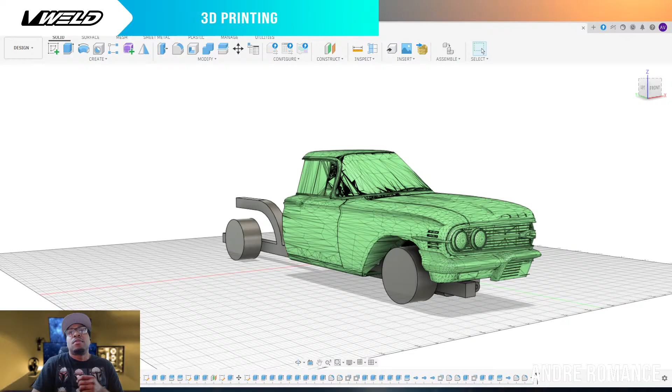So this is where we left off at, where we designed the swing arm mounts, a little bit of the frame, and a rough estimate size of what the rim is going to be like. This is just a rough estimate. It's not going to be the exact size of the rim, but we'll see once we get that far.

So first thing we want to tackle where we left off at was creating that hole distance for the shocks. And there are so many different sizes of shocks that you could use for these applications.

Let's go here. I'll shut that body off real quick. This inner hole here - what we want to do is create a gap big enough for our shocks to go down inside of there and to have a little bit of extra play. So I have 3 different sizes that I mapped up.

And I'm dealing in inches if this is your first time seeing me. I like to deal with inches because it's a lot easier for me to gather. It kind of feels like a 100% ratio number system, so it's easier for me to think about.

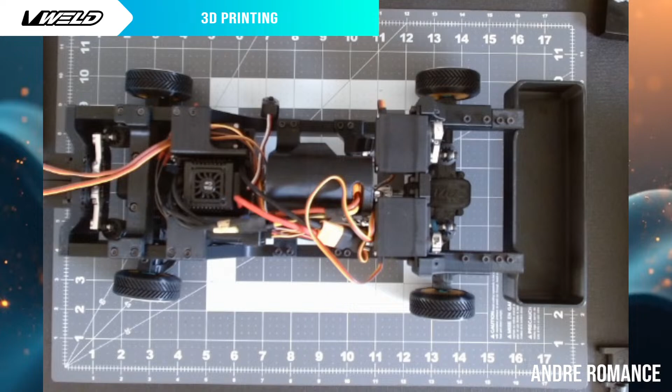Your servo horns, right? So let me take y'all over to the workbench. I probably could just show y'all exactly what I'm talking about a whole lot more than what I'm trying to do here. All right, check this out.

So this would be like ride height, right? Totally out, this would be around ride height for us. But when we have this thing totally bottomed out, these portions here sometimes extend out further than the axle, or the top of the chassis. So it'll bite into the top of the body. When these bite into the top of the body, you don't get a full bottom out.

So depending on how high or what your length is on your shocks is going to play a good part in you getting the right height for your servos or whatever. Now your servos, with them being as close as they are, you only have so much tolerance between the length of this rod here and the height where it mounts to the shock.

So that's what we gotta pay attention to the most, because our boy Derek, he went with the standard size servos. On this system here, this is an 8 inch wheelbase length. We are losing 2 inches of that play because our wheelbase on his vehicle is 6 inches. So what we're compensating for now is that this part here is going to be closer together in order for us to get bottomed out totally.

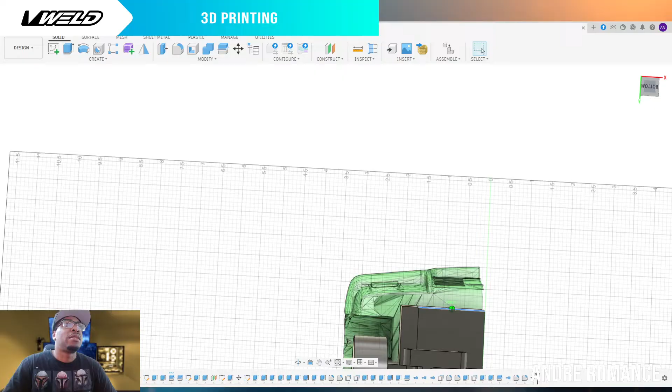I need to remap this body real quick, because I think my scale is slightly short or slightly shy of the 6-inch wheelbase that we were talking about. Or am I mistaken? No, that's right. We're lining right up at 3. So that's right, that's right.

Sometimes you have to say, sometimes you second guess yourself because of the way the numbers look like they're laying in. But all right, let's do this.

So what I want to do is get a reference of the height of that vehicle. So once I'm designing at the center point here, we can do what we need to do. Okay, all right, let's get the right height here. So I am going to do,

Let's get rid of the swing arms for a second. Knuckle. Let's see the body. I should have got rid of all of these other bodies that I'm not using, so I don't have to keep on scrolling down the list. About 100 bodies that are just in here. I'm not gonna do that individually. I should have did that off camera. I don't know why I don't think about this stuff when I'm not live.

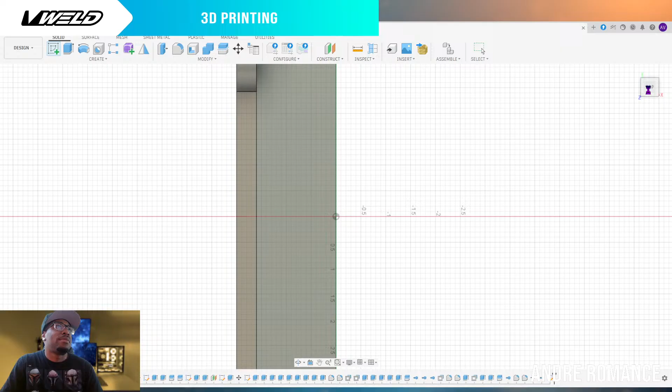But let's do this, so we'll turn the body off for a second. We're not going to keep this box, we're just going to line it up so we can have a reference point here. We're going to draw onto that base that we were at before. Come on, there we go.

All right, so we're going to draw right into this base. We can use a square for this. And this doesn't have to be perfect. This is just giving us a rough estimate of the height, kind of where the servo mount is going to meet the shock.

Right, so now we have that. We're going to close this out. I'll come over here, we're going to extrude this up as high as we can get it with that body being on. And we're going to get rid of that swing arm on the top.

Top swing arm, let's get rid of the bottom swing arm too. So anything that will stick and become a part of this, we want to get rid of it, so when we're extruding it doesn't add on and join as one part. That's something early on you gotta get into a habit of, because you don't want to be designing and then all of a sudden merge a piece that doesn't need to be merged.

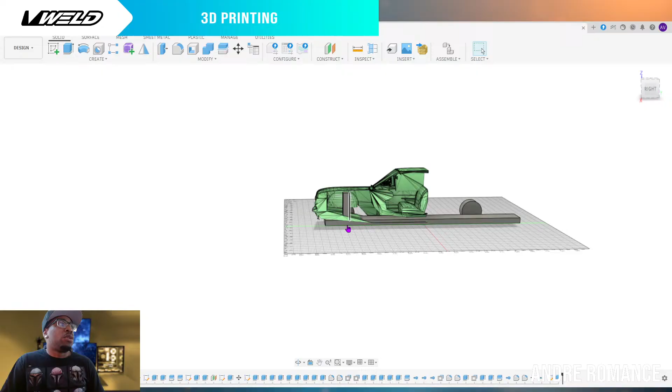So we have this, right? We can go ahead and bring our situation back with the swing arms, right? Zoom in on that, we can get rid of that. We're gonna bring the swing arms back in. Knuckle and the swing arms, right?

So we can actually go lower than this base here. That base just gives us a reference of how everything will sit. But off from center hole, we're gonna possibly bring it from this part here, straight down the middle of the lower swing arm, and then we're trying to measure up whatever that 2.5 or whatever is. Now we know this line here is the middle of the vehicle, so the servo mount, the servo horns are not going to give us that play. The servo horns are going to sit somewhere in this area here from the center, and then they're going to cant out in this direction.

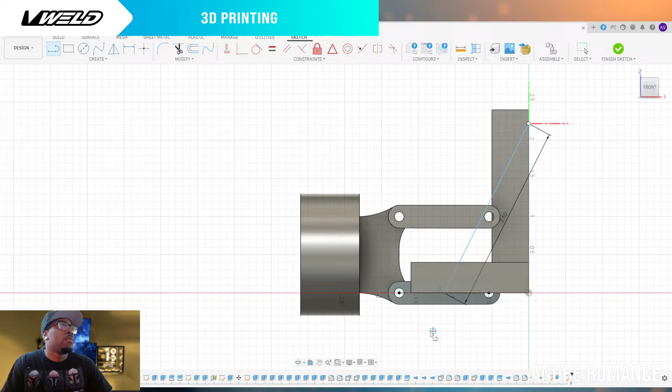Let's bring that body back. Oh, never mind, never mind. It felt like it wasn't within that tolerance, but somehow that worked out.

But now that would lead for our servo rods to have to be right at the top of what we're sitting in. So I think we might be all right, this might actually work, guys, this might actually work. So we'll map it out, let's map it out and see where it takes us. We might even get this thing to sit straight.

And that is, in my opinion, the best way to have your servos be like an L, straight flat, right off of the spring. So you have a lot more travel room for that push, and then you don't have to worry about your spring being at an angle.

Just a second, guys, I gotta go grab something quick. Yep, yeah, you need? Yeah, so I gotta put off the water. All right, sorry about that, guys.

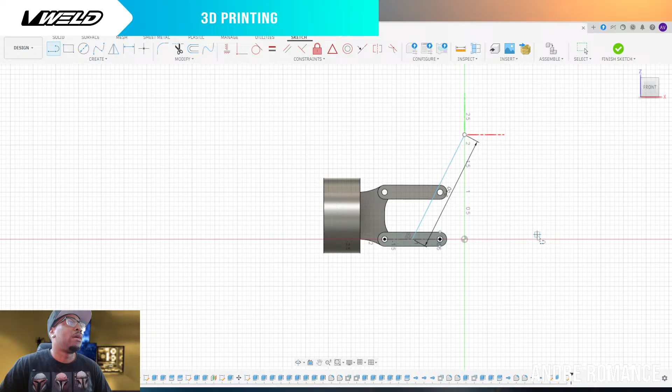All right, so let's take that floor back out. That makes me feel a lot better to see that and know that we are within our tolerance. Sometimes you can second guess the measurements and jack them up. That hole is at a 0.12, so we can always go a 0.13 to make a nice wiggle room.

The outer structure of that whole area would be a 0.3, right? Well, 0.4. That would be like the outer case that holds the shaft for the shocks. Yeah, so I don't think we're gonna have a problem with this at all. All right, let's finish that up real quick.

We're gonna extrude straight through this thing. I may even want to move it over. I want this to be more on the flat side and not specifically down the middle. So let's do that before we extrude this. We'll go double tap back into that drawing.

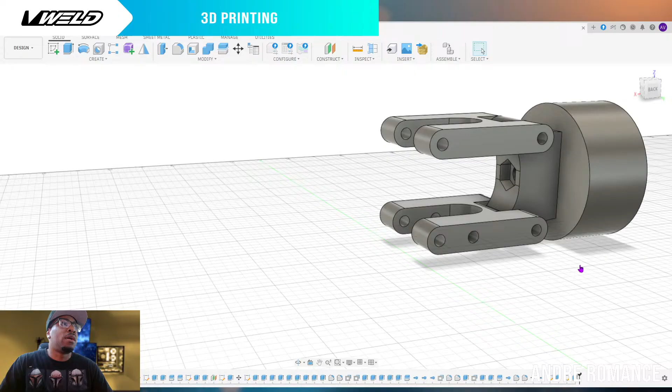So with this, I do want to pick a side, and one of these holes is going to be bigger than the other one. For this application, one side will have an encased layer where the bolt head actually fits in flush with the side, and the opposite side will do a bigger hole for a brass insert. A brass insert, I usually go anywhere between a 0.15 and a 0.2, right? This just gives us space to press that insert in there.

So one side will be bigger, and we'll maintain consistency with that on the same side of whatever we're doing. So even here, if I choose a side, I want all of my inserts to be on the same side, so I'll push those holes out to that distance. Right now we're at 0.13, I just have to move them out a 0.05, or a 0.1. No, 0.01, because I think, if I'm not mistaken, it's moving it from the halfway point.

What we said, 0.01. Yeah, 0.01 makes it a 0.15 now, because we have to cut it in half. You know, whenever we're working with those circles, it's not going to give us the exact number.

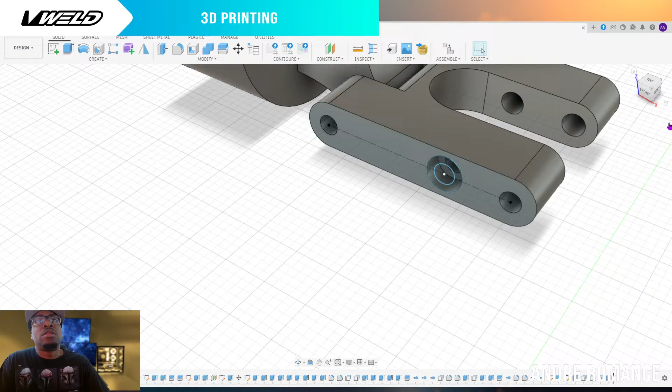Also, it adds a little stability too for the bolt head to not want to bind and turn and twist outside of the part. So there's a couple of things that it does for the durability of the parts too.

So that's what we did there, we would have to do the same thing for these parts here. Sometimes when we do that, we would end up having to add meat around these areas, and that will cause us to end up with like a nice bow or something like that with these parts. I mean, the sky is the limit for designing how to make a part look nice and keep that strength to it as well, but that's what we want.

So we got that. Probably could have, like I said, I would have minimized my workflow if I'd have did these circles here in the same setting rather than having to keep going back and forth with it. That's what I should have did. So what I should have did, I'm gonna do now, 0.23. Yeah, I'm gonna do it now, I should have did it all at once. And that's how you stretch out your time and waste other people's time.

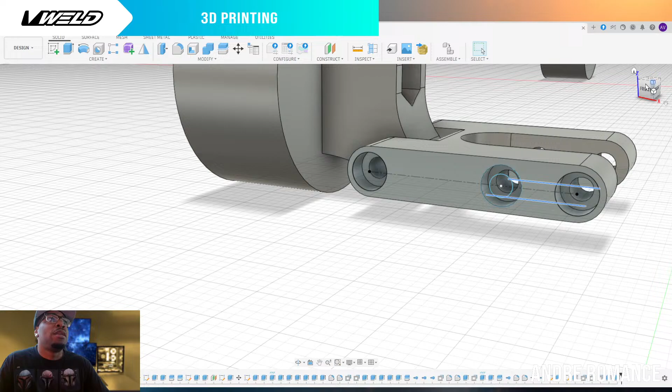Having a 0.5 gives us a lot of wiggle room and play for if the binding is fully extended or fully lowered, causing the shaft or cylinder of the shock to slide through here a little bit. Like if that ends up at a 45-degree angle, remember we talked about the shock coming in at an angle sometimes. With it being at an angle, the shock cylinder is going to go past the arm a little bit in either direction, and if we make it too tight, that cylinder won't fit. You'll end up with a bind right there, so that's why we leave that space. But if the shock ends up upright, that's something you don't have to worry about, and that area can be as tight as you want.

But there are other ways to work around that, because this hole doesn't have to be flush with these holes. We could have extended that hole, or put it above here where it doesn't interfere with the inside of that mount at all. If we wanted this to be even more durable, we take this hole, bring it up above the swing arm plate, and make this whole area solid — kind of like what I did on my other swing arm here, where it's flush and the hole sits above. Dropping that hole down inside the arm gives it more space to bottom out, especially since we're working with a slightly smaller scale than 1 to 10.

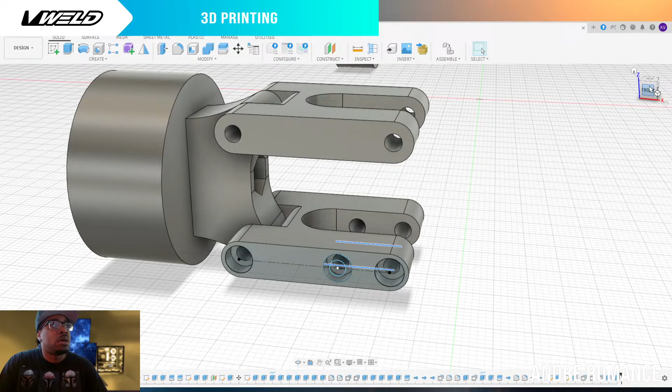The next thing I want to tackle is where those servos are going to sit. In order for us to get there, we're going to have to bring in the frame again.

So we know this top arm here is not going to be connected to the spring at all, right? We're tracking that — this top swing arm is not going to touch the spring at all. With that being said, this has to be attached to something, whether it be the servo mount or just the frame. Now I would prefer to have it attached to the frame, so it's kind of out of the way of everything else going on with the servos. But also, it's going to save space to design that mount to be attached to the servo mount, or the servo mount to be attached to the frame.

So it's kind of like you have to do both at the same time. Because we probably want to tie them in together, I was looking at this inside of the body, and I want to use the top side of this, so I'm probably going to end up bringing this area down a little bit so we can get that portion here on the top side of things.

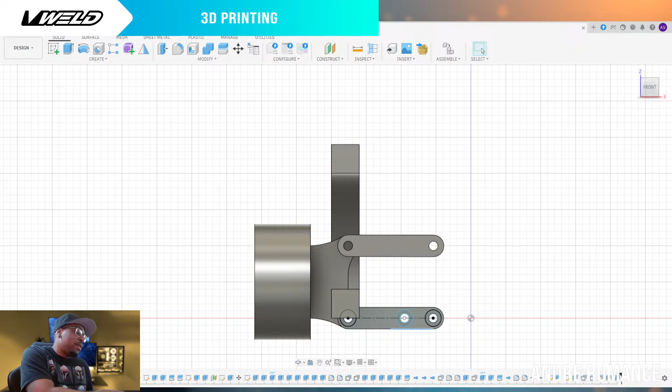So either direction, I think either direction will fit because we have so much play. This bracket here comes in at 2.25 on the height. And then if we can't get that, we can come in with that width because we said we got to be within 6 inches.

If we drop them in on the width side, it's going to come in at 4.6. So 4 inches and 6. So that's something to consider. Both of these are something we'll have to consider when designing this in here.

Which would put, man, that servo horn, it would put the servo horn around this area here if we go flat. So the servo horn being here, the arm would extend back out this way in order to give us a bottom out, or the servo mount could be, or the servo horn could be on this side here. That might actually work.

So let's design them flat first and see how this plays out for us. So based on needing this to come like a latch or whatever coming down, like a hanger, where it hangs on top of these mounts here.

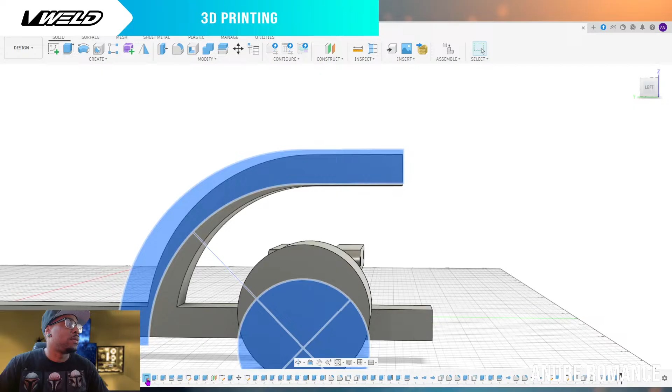This one here. Yeah, all right. So what we want to do is offset this, right?

Let's offset that. What we set by a 0.5. Was it a 0.5? Maybe a 0.5 may be too aggressive. A 0.25. If we do 0.25, or no, a 0.30, because if we can do a 0.30, then our bracket can be a 0.30. Yeah, 0.30. Okay, so we could do a 0.30.

We could take - we're gonna do just a tangent arc. Come on, don't. Sometimes if you don't get the right direction with these, they act up on you.

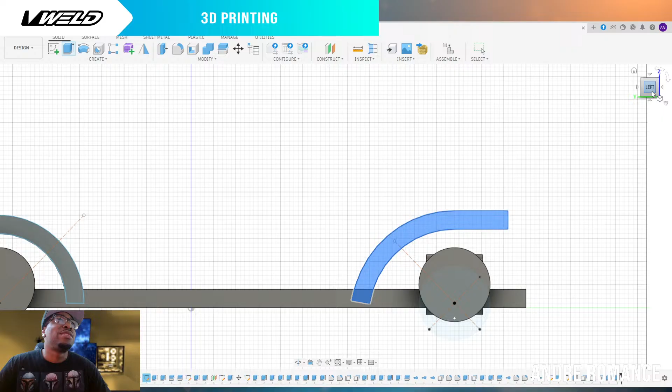All right, so we get that shape right there, and then we got to extrude it out ourselves. So because we have moved this away, let's do this. And I don't want it to end up jacking up any of this stuff here. So we're gonna hide those. We'll do a double-sided, a two-side extrude.

So this side here will attach to this area here, and then this arrow here, we'll click that arrow there, we'll attach to the opposite side. This will give us that push all the way through. Now it wants to cut - we don't want to cut, we want to join. So we'll change that setting to join, and we'll get that new thing going right there.

It's always cool if you start big and then pull your way back from that point and shrink them down if you need to shrink them down. And also it'll always be inside of your history, so if you want to undo this stuff you can, but that's why I keep it simple. Like this is simple, I don't overcomplicate it, I don't try to overcomplicate it.

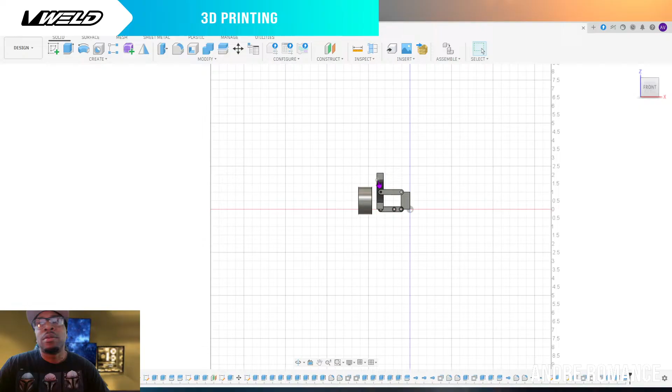What we got - that swing arm. Okay, so totally bottomed out. We still gonna have a nice little space for this to bottom out. So what I'm looking at is the space between here and in here will probably be around the same height as the tire. And we're nowhere near close to this here being hitting here.

So we're gonna have a good position on this. Even if we gotta move this frame inward, we can still move this frame inward as well. So we got a lot of wiggle and play room here. So it's not going to be a problem.

The thing that I wanted to get to is that top surface, right? So if we go back and we look at the body - right, we look at the body where that body sits - the top of our bracket for the servo is going to rest on top of here, which is going to be a 0.3 that's going to add to the top height. Then we'll have the screws that come in.

One thing I'm curious about too is how it's going to play out. We might end up having to put the servos on this side rather than on this side. The body frame sits out here, right? Like a lot of this is going to be hollow to about this point here.

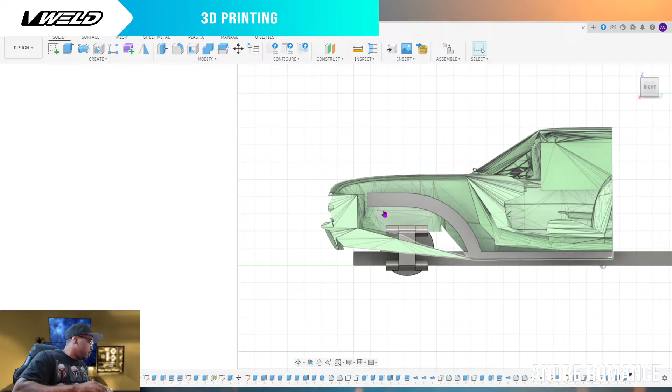So from here to here, a servo is not going to really fit in that space. Even if we go flat, we still may not get that space for that play to happen. Our servos - the width of the servo - I should have grabbed the servo anyway.

Yes, sir. Yes, sir, I got you. Just a second, y'all.

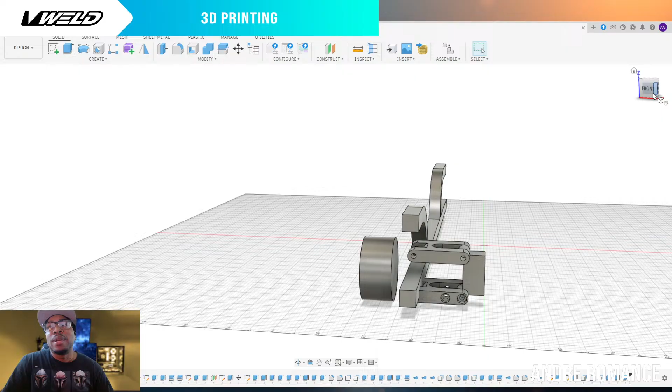All right, so I was thinking about going flat at first. Let's start with this one, and let's see if we can get this to play in nicely. Hopefully it does work out. But if it don't work out, then we just go to the flat and do it that way. But we got to do it how we got to do it, right? We're gonna do it our way.

All right, so let's bring that flat plate back. That flat plate is going to, where is it at? Center plate, right? What I want to do for that center plate though, I want to pull, let's get rid of that.

The axle in the frame for a second, and the bottom swing. I'm gonna cut this plate back. Now this is just a template, but we're gonna cut it back anyway. This is just gonna give us that area to play off of. Okay, so

we'll actually create our servo mount based off of this area. So, servo height. This is where the numbers get exact, like the exact measurement of the servo, so the servo clips in here so nicely.

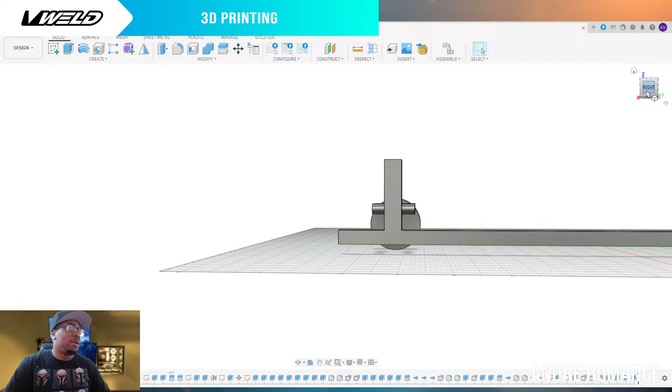1.565, right? 1.565. So let's draw off of this. Let's draw off of this side here. Drawing off of this side here. From the top.

Frame back. From this top edge here, we're going to be drawing out across here. But we're going to be drawing onto this surface. Or should I say the back surface? We're going to draw off of this swing arm surface.

There's so many options here, right? And that's why I'm looking at this like this, because there's so many options to choose from how to do this. So come from this side. We do want to draw based off of this top edge here. So let's draw us a square based off of that top surface.

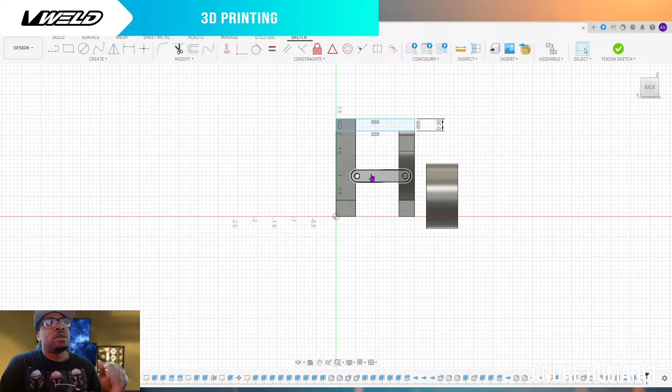But also the weight being forward or backwards will give you a hop height as well. With it being on the back side of the wheel well, we're probably gonna add more hop height as far as the range of the hop, but we'll lose in terms of that front bounce weight, like on the rebound, on the recoil of that bounce back to the floor, we'll lose a little bit of weight on the front end. So those are things to just play around with and think about. But also, when you have a compact space to fit everything in, you just have to roll with how you can fit it in there as best as you can.

Let's see, these frames that I had marked up, I think I went with 0.3s on all of these. Oh, never mind, these are 0.4s. So I guess I carried it out through the rest of the framework, the 0.39. Yeah, 0.39s and 0.35s. All right, so let's go that route then, and keep it kind of consistent with what we did there.

Like I was saying, the servo horn, you want to kind of map it, how it's going to be. So what I'm going to do is sandwich the servos together because we only have that 6 inches of play. I want the servo horn to actuate towards the outside, towards the frame, rather than the servo being on this side and actuating into the inside. Now that's something to play around with later on, but if we can get the servo horn to swing out to the outside of the vehicle, it'll be a lot easier for us to get that height range on that swing. So that's the direction I want to go with it.

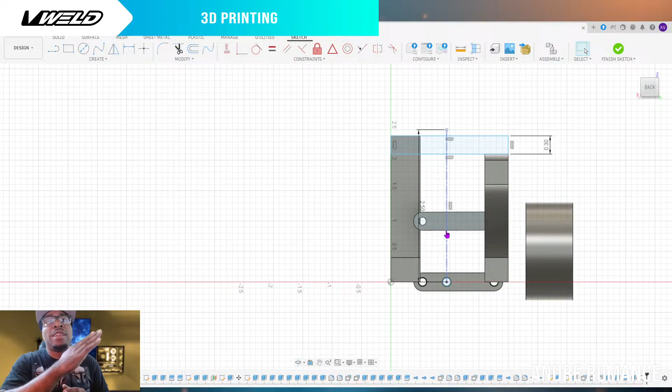This is what I was saying about being inward, see if you can't fit this in. Say this top rail here was the top surface of where the car body is going to rest, right? This would be bumping right at the top of that body, and this is the center hole. So if you add 0.3 to this, we would not be able to hit total bottom out status with this. Our servo would end up having to be on this side so that this could swivel in towards the inside so that it can accommodate for that length to fit somewhere. It had to fit caddy corner rather than upright.

So I mean, we might have to go that route. I didn't want to have to put them on the outside, but we might have to put them on the outside. But it's all right if we do it that way, it's all right if we do it that way. I'm all right with it. All right, so let's do this, we're gonna draw out our square, right?

Let's go 2.5 for the bracket length. So that'll be from the bottom side. No, that'll be the top side. Let me measure this again. So we want to go from 1.565. Let me calculate this up real quick, y'all.

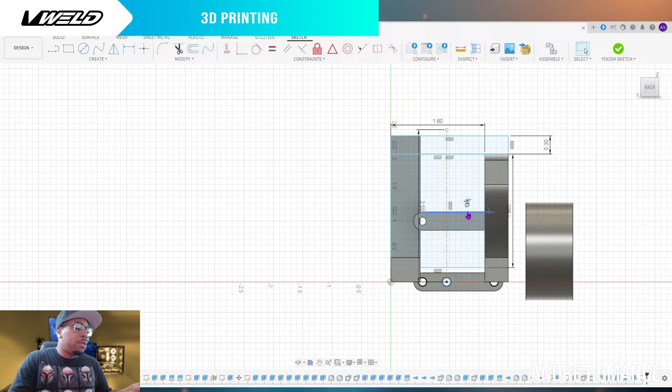Thickness of our servo, .93. Man, let me get the servo out, man. I'm trying to do this on the fly. It's bothering my brain capacity to think right now. Let me grab a servo for real.

They came and fixed it. The water thing is really something. All right, y'all, I'm sorry, man. I was supposed to grab this thing a while ago, but I didn't.

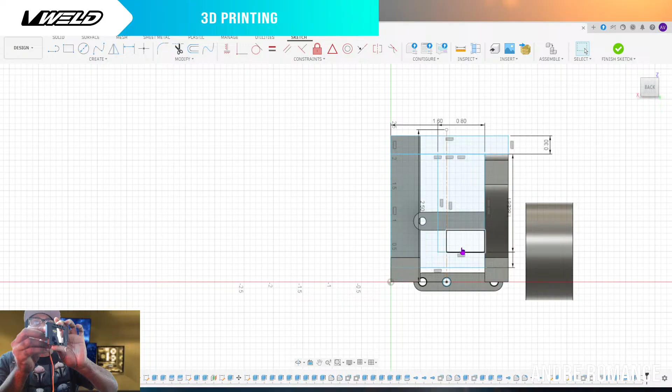You don't have to worry about it getting stuck, or like these wires here. Sometimes when you make the fit exact, you won't be able to get this wire in there and through the frame. So those are things that I ran into in other designs. Like I think this was one of them. I designed basically off of the front mount, where it goes through the front. Right, it clips in like that into the front.

But if you're designing it to slide in through the back, it won't fit in there because the cord will not go through the back. This was some stuff that I had ran into issues with, like trying to design this. Like with that cord, it's such a perfect fit that you can't get it in there. Those are things to think about, because when you're trying to do maintenance on these parts, you're going to end up having to unscrew a lot of other parts in order to get to it. So the idea was just to have it fit flush in there, without having that hassle of trying to find that wiggle room.

So with it being a C channel, you can have it mounted into the back side. So that'd be the difference.

Whether you're going to mount it on the face of this, where the servo horn is only sticking out a little bit, or mount it on the back side where your bracket is going to sit back on the back side of those attachments - those are things to consider, how far up your servo is going to be sitting compared to where it's going to land on this frame.

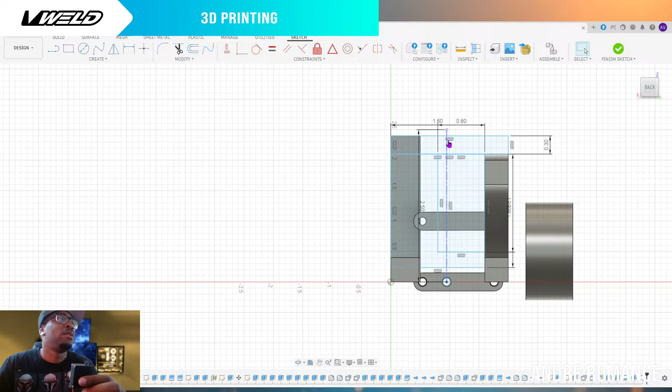We'll have this C channel here for that servo to sit down in the middle. If it sits in this vicinity inside of this channel, we're looking for our hole to be somewhere around here for that servo mount, which would swing out to that side a little bit to give us that pivot link right there for the shocks.

All right, so next what we want to do is create a line here too for that mount. This mount is going to go all the way across the top, we're not going to stop shy of there. We're going to go out 0.3 and then carry it out the rest of the way so we can get that bottom side there. Now we have that line going there.

Now from our center point to center point, we're going to find the center point line, and then drop those holes in. Those holes are going to be our mounting points. I like to countersink the holes on those as well, just like I did in this bracket here, just so it gives you a nice clean area - you don't have to worry about your servo horn hanging up on those.

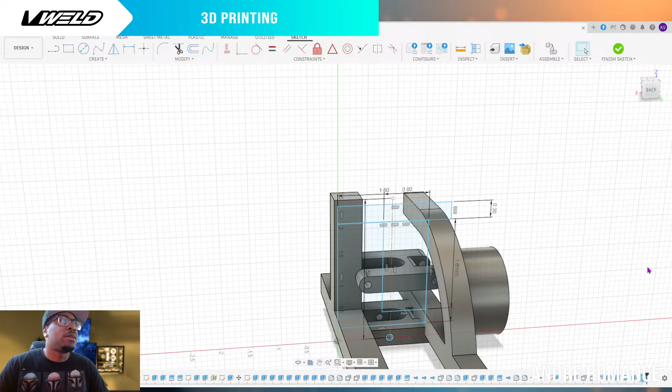All right, so I'm gonna extrude this out. I'm gonna finish it up, extrude it out, and then we'll come back into it.

Let's go back in real quick - there's one line that I left out. And I thought that I drew the line on the right side, but I drew it on the wrong side. There's this line and then that one.

Let's get rid of that center block real quick. Sometimes it'll be trying to snap to so many different things that you can't really see. Let me drop the measurement here so I can see where this is going.

That's the measurement there, and bring them down from there, square them out. Actually, you're supposed to go all the way down. Now we can get rid of this here. Just like that.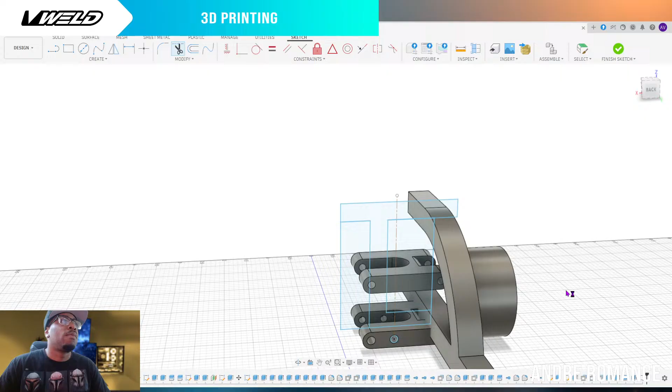So now y'all see what I'm saying as far as this here. We can extrude these out.

What was the extrude? A 0.3, right? That's a 0.28 on these brackets here, but I think we'll keep it consistent - 0.28, 0.285. Yeah, let's go 0.3. I want to keep these numbers where they need to be.

Only way we could do this and kind of remember these numbers is to make them simple. I had to keep reminding myself to make things simple - sometimes that's the hardest thing, especially when you think like a mechanic or engineer. There's always a creative way; as an engineer you want to push yourself to the limit and get your creative juices flowing, right?

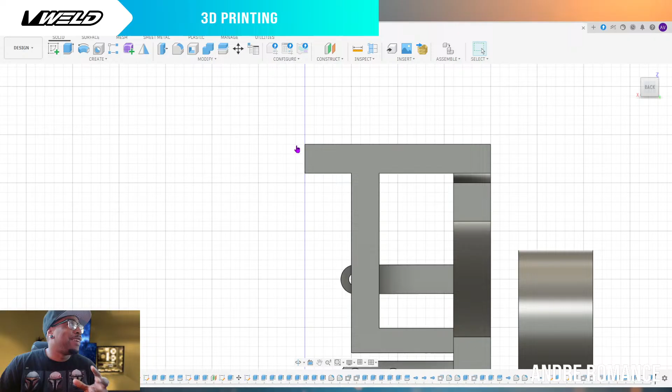But in doing that, you always create something that's just like, why would they do that? Especially when you're working on cars, you go, man, whoever engineered this did a number on us because now we can't get this part off without removing the whole engine. But in the time of creation, whoever that person was, they were in their zone, like yeah, we're gonna do it like this, we're gonna kill them with this. It's kind of like that vibe you get every time you create. They ain't gonna be able to get that part off or replace it without going into a shop.

All right, so we're gonna draw some more lines up. This way we're gonna draw our center lines, get those holes in there, and then find the placement of this. We gotta find out exactly where on the frame it's going to mount and how. There's gonna be an L shape or a T that comes off, giving us the possibility of two holes to screw down to, so this part doesn't be flimsy, because we don't want that. That's just all a part of sturdiness and stability.

So let's draw some center lines here. From there to there would be a center line. And then based off of that center line, we're gonna draw another center line up here. So from that center line, we can create another center line. Well, hold on, let's do this. Let's move this center line all the way. So center line from there to there, 6.5. Then we can find the center of this. Right, you draw the center line off here.

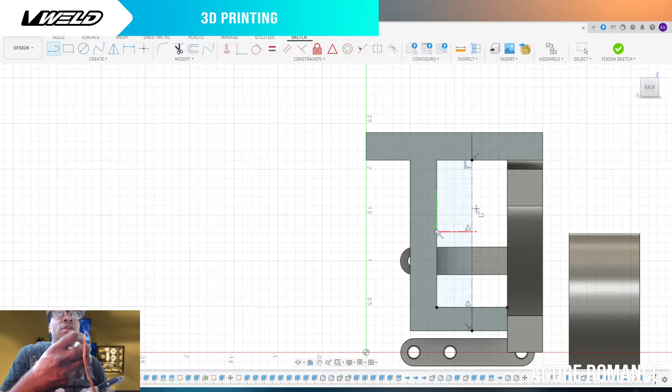Also, there's a little groove inside of your servo mount or your servos where it's like a little triangle in between the holes. You have to compensate for that as well if you're going to mount from the front side. So we put all of that into play here. That'll be notches on the top and bottom side for those to slide in there the way they're supposed to.

So that gap, 0.055. So 0.055 will come from the center point here and then go up here. It'll just be a slash going through the part. 0.055 to a 0.02, 0.025. All right, so go up to 0.025. What am I drawing here? Oh no, it's a 0.25. That's why I'm looking like I'm thinking it's a circle. Yeah, all up in my grill nuggets.

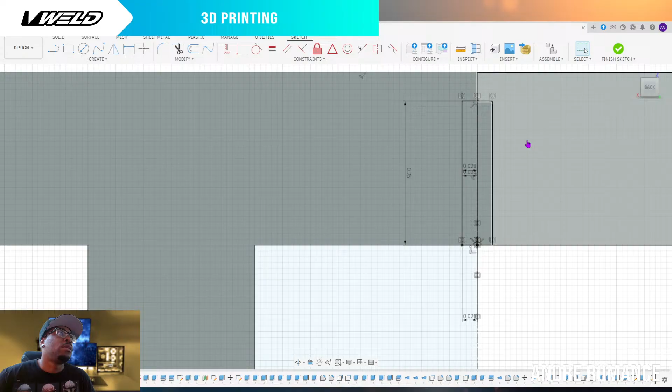Center line will be here. So this whole area right here is what's going to get cut out for those center notches. Now, because we did a bottom side, we have the bottom side of that area. We can select these and mirror the bottom side as well.

Where is it? There we go. All right, so we can mirror that, and we can mirror from this center point here, and it'll drop it down below for us. It should have, which tells us that this line is off-centered somehow. It shouldn't be off-centered, but it is for some reason. All right, so let's not do that right now then. We gotta figure out why that center line wasn't centered. Blows my mind. Blows my mind.

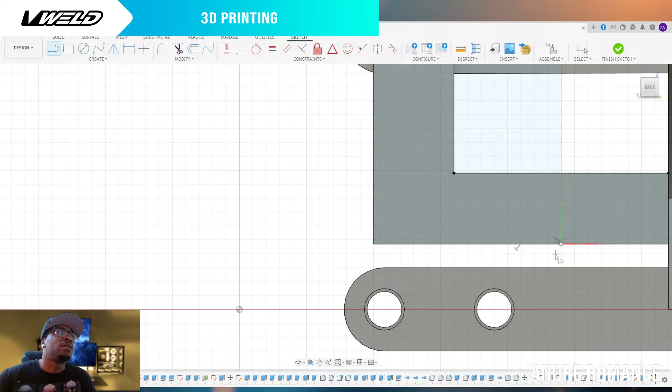All right, let's draw us a new center line. Sometimes with these platforms, man, you don't know what's going on with them or why. Sometimes they don't give you the exact measurements you're trying to get.

So we got rid of some important constraints from those boxes that we had drawn out, but we're not gonna worry about those, okay? We're just gonna draw us a new box, and we're gonna get rid of those old lines, okay?

Now to go back to what should have been that center line somewhere in there. Right there should have been the center line, but I don't believe that's the center line.

Another option too is to draw a center line on this side and then come up from there. So yes, it was giving us a center line that was off center of this line here for some reason. I don't know why it does that sometimes, but you know, it is what it is, man. We're gonna keep pushing though. I think we're off to a good start with this design here.

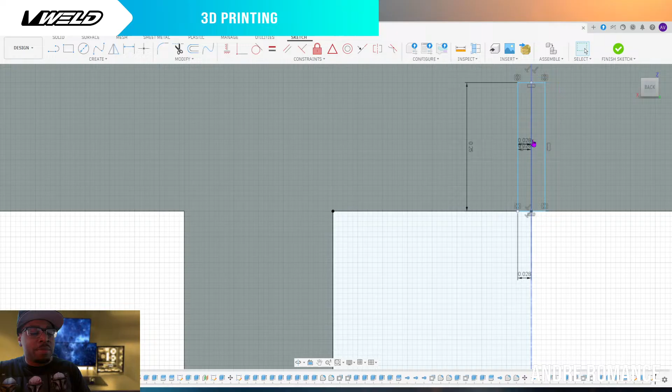It could take your time. You get your measurements right, and then you don't have to worry about coming back to it. But if you rush it, then you're gonna have some problems.

So 1.19 is what I'm looking at based off of center hole. The way that we want to do this is from the edge of this servo. I'm not going to measure those holes off of the old frames. I'm just going to keep it consistent with this here. But if we measure up center hole from the base, we're at 1.165.

So if we're measuring from this bottom plate part here, we're going up 1.165, right? So what we would do is get rid of the center lines that we have here so we can actually see. Right, so we get rid of that center line. Then we'll come up 1.6 and then we'll go across from there.

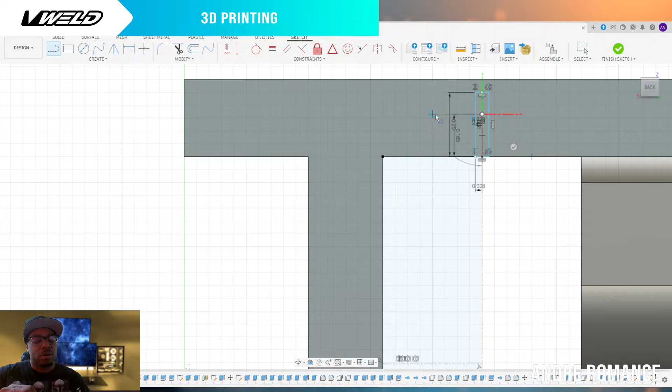So if we go center hole to center hole, we're looking at about 0.385. So 0.385, we'll take it and divide it, right? 0.385 divided by 2 gives us a 0.1925.

So at a 0.1925 from the center point, we can get our distance from hole to hole. 0.1925. Oh, I did it again. 0.1925 locks us in right there. So that's our center hole. Now from this point, we draw our hole.

We should be able to convert this hole to mirror this hole from this side to this side, and then measure both holes, or select both holes and then mirror them downward, and then we'll be done with those two holes for now.

But also we want to do that. We want to do the countersink holes as well. The countersink holes are going to be the same as the other countersink holes that we had before, and we can just click on those to get reference points rather than having to remeasure those. But I think that we're sitting at a 0.3 as far as those countersink holes.

For these holes here, we're going to do 0.13 because we don't want them to be snug on the screw. We want the screw to go right through the hole. And because the average M3 screw hole is like a 0.12, 0.115. Okay, so taking it up to a 0.13 gives it that wiggle room to where it just fits right through the hole, no hassle.

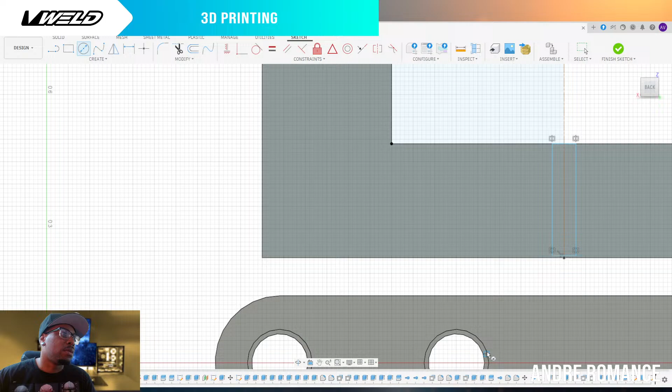Okay, so that's our hole. Then we're gonna have to do a countersink hole as well, which is I think what we're saying, 0.15 was for the countersink holes. Let's see. Let's select.

Oh no, we're on the other side. We gotta switch sides so we can look at what that countersink hole is. Countersink hole is 0.23. All right, so I was off. I was way off. I was at 0.15. We should have been at 0.23. But that's the difference of just double checking and just throwing a number out there off the top of your head.

2.3 gives us that much right there. 0.23.

So now that we got those two, we can select those two. We can mirror and hit our center line here. It just gives us our circle there. We have those two there. Measure, select them all, and then mirror again, and then go and select our center point there, which would give us...

Why is this off? Why is this so off? I don't know what's going on here. If I'm mirroring that off based off of the center line here, why is something going crazy here? I don't know what it is.

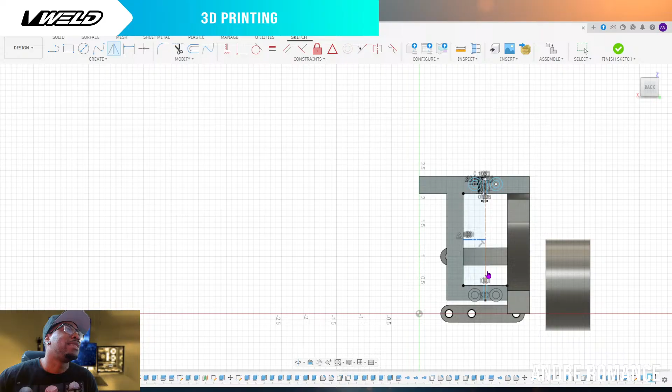But we're based off of the center line here. Unless this bottom portion is not the same size as this top portion here. And I think that's what's happening here. I swear it'd be the slightest thing that throws you off and you'll think that you're wrong.

So I can take a measurement from there. That's a 0.3. And then this.

Let me see what the distance between this and that is. 0.255. That's what the difference is. So we're missing a 0.055. Well, 0.045.

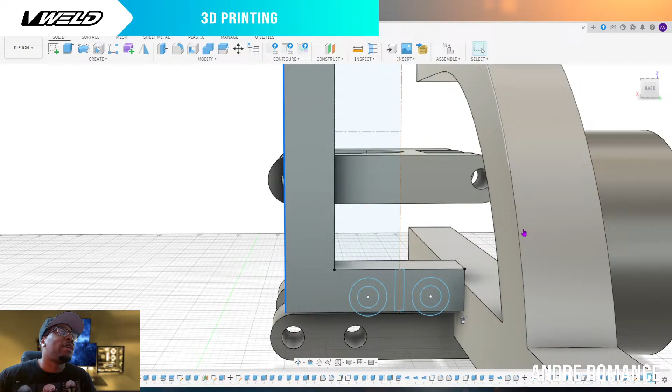Let's see. Oh, you know what though? That's why that happened. We didn't measure these out from, so let's finish this out. We didn't measure these out from the holes in the beginning because we used the other bracket that I created to get the whole length of this. And that's what happened. Yeah, that 1.865. Okay, so that's what threw me off in the long run because I was skimming and cutting corners in the beginning.

So that's what happened, y'all. That's why those holes weren't lining up right. But we're gonna get it. We're gonna get this together. We're gonna extrude this down.

I think we needed 0.045. Puts us in the ball game, I think. Let's look at it again. If that wasn't it, then we got like a 0.05 left. Yeah, that was it. Yep. All right.

So we got our little notch there. We got the whole surfaces with our thing measured out. Okay.

Now, I mean, this is bare minimum work that you're gonna do when designing these type of parts. The idea is just to be optimistic about the measurements and just know that you're going to miss some measurements, or you're going to accidentally create a hole somewhere that it shouldn't be, and you're gonna go back and have to fix it later. And just don't beat yourself up when that happens.

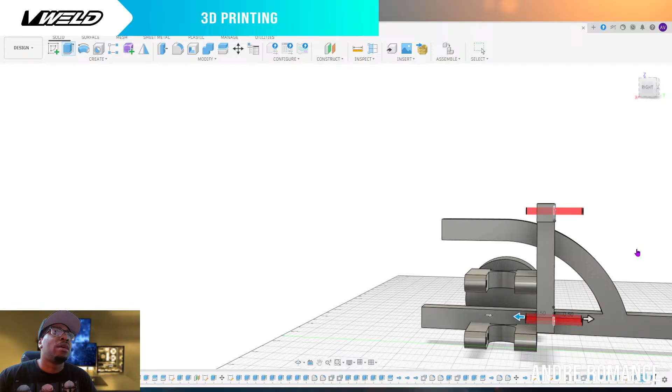So we got that, and double cutting both sides like we always do. Make sure that hole goes all the way through there the way it's supposed to. And then bring that picture back up. We're gonna countersink our holes for, I think, what was

measured from that base to that right there, 0.13. We're gonna push these in 0.13. That extrude inward, negative 0.13. Gives us a nice little shelf for our screws to fit down inside.

And now we have this sink part right here for this little lip that they created on this thing. I guess we could probably put that at a 0.13 too. Or 0.1. Let's do a 0.11.

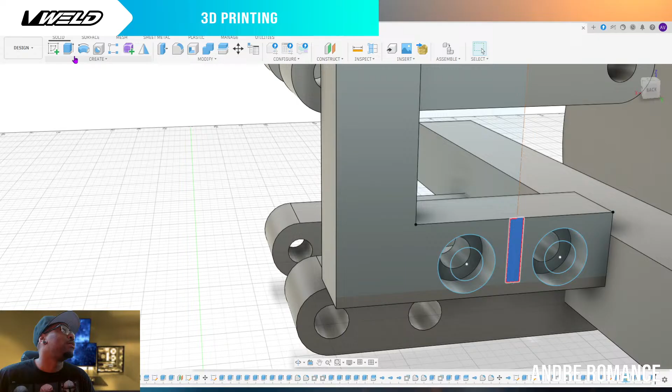Sometimes that won't be enough for the printer to create that space for you, because sometimes your 0.1 is what a one layer would be, the thickness of one layer. Extrude negative 0.11 gives us that space in there. Now we have that space in there where it can flush mount.

The thing with making this identical to the other side is that if we come to that point where this doesn't work out for us, we can always flip this around to where these holes will be on the opposite side, and we can still get the same, we'll be able to still mount it properly. And how we do that is by when we make our hole mounts for this portion here, we'll make this down the center. So instead of me making a bracket that comes off L shape to this side here to have the two holes here, I'll make a T right here. Creating that T right there will cause you to have some issues, like as far as printing, but also it will give you an option to utilize both sides of that bracket.

But also on the flat side too, it doesn't necessarily have to be mounted on the top. You can mount to the side. I can have screws that come in through the side here. But that's just something to think about.

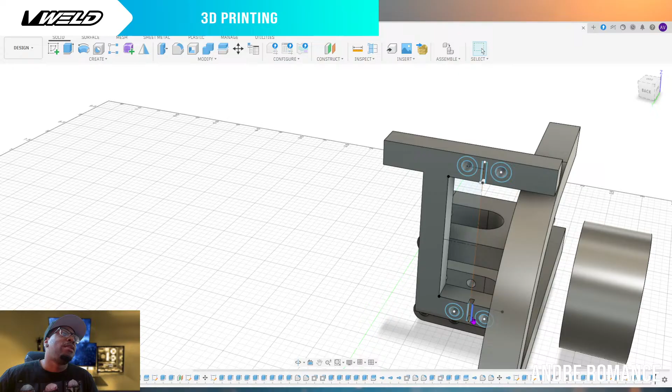All right, so what we're going to do now is I have to take these holes to the opposite side. So the extrude that we just did, nope, not that one, this one. We got to unextrude these. Take them away, delete. These countersink holes have to be on the opposite side of this.

So how do we do that? Well, there's so many ways to do it. We're going to focus on the two-sided extrude, which is going to allow us to start from the surface on one of the extrudes and then cut into it on another.

So when I extrude this, I'll select two sides. This top side here would be strictly on that side there, which will give us that whole play. And then this side here will lessen the number until we get to our point 13. That's what we have. It'll cut it from the 13 of the other side and not necessarily from this side here. Well, actually it's doing that anyway. Let me see.

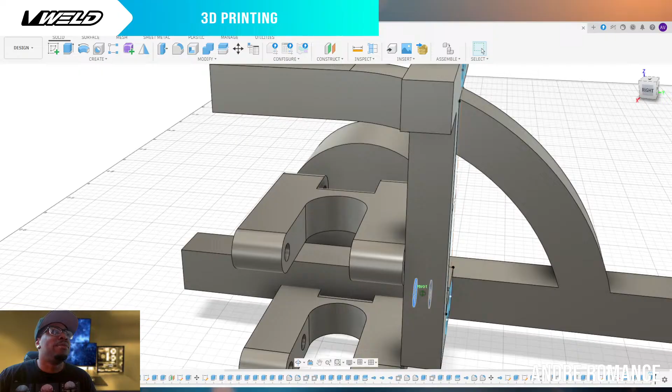All right, so we no longer have the hole on that side, it's on this side. Let's see if I did my math right. Hopefully I didn't let y'all down. I did it right, 0.13. All I did was cut the difference in half. 0.13 plus 0.17 is 0.3. Quick math.

But my math ain't always that quick. I want y'all to understand this: when you're thinking about designs, it doesn't always math for you. All right, so let's get rid of that sketch.

This is how it would normally look like coming off of here. If you wanted to print this flat, because that's probably the best way to print these, is to just pick a side and stick to it. And if it doesn't work out for you, you just go back and print it another way. Kind of like how I do most of the time.

Most of the time I make a bunch of prints, and there's nothing wrong with that, but sometimes, man, it just doesn't benefit you to have to print a bunch of times, waste a bunch of filament.

This is that part I was talking about that we're just gonna do, you know. It's not planned, but we're just going to do it. I want to be able to put this wherever I want it. And with this being a rounded edge here, we can't really get to that portion.

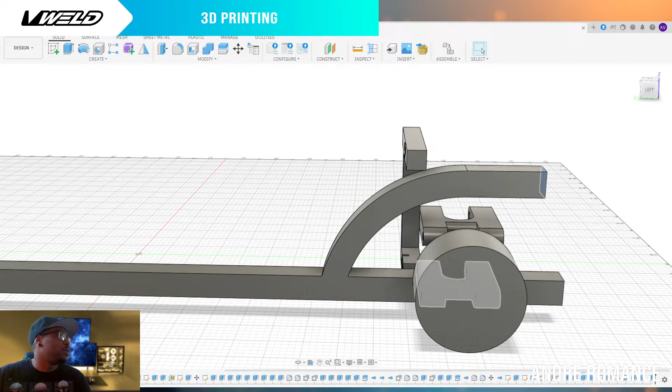All right, so we have the wheels. Oh, it's attached to the frame. All right, so what we're going to do is split this off of that body first, because that happened, that happened right there. All of this got connected together.

Okie doke to myself, y'all. All right, look, so the frame, this gotta get split. Oh my gosh, yep, that gotta get split. This is the top swing arm.

Yep, when you get designing and you forget to remove or make the parts invisible, you end up with those parts that you gotta go back and undo, you know. You gotta cut them off. And yeah.

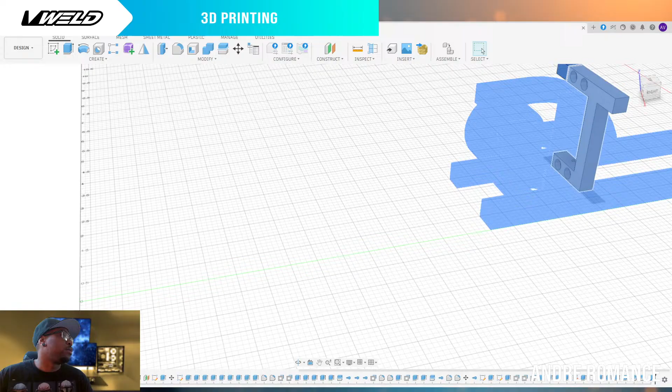These two are going to get merged together. So one. Okay. And then this one and this one are going to get merged. Not all of them, just that one and that one.

Merged to one body. This will be the servo mount. Okay, servo mount, or should I say front mount? And then going back to the frame, we have to stick that back together. There.

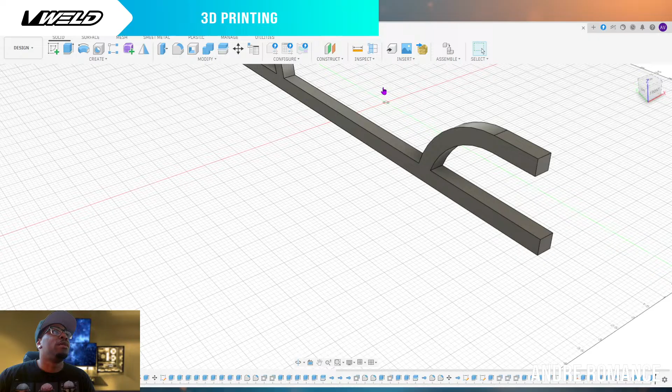All right, so now we got this back where we need to have it. We joined some parts together that shouldn't have been joined together. But what I'm going to do as far as creating that lip for us to mount to for the servo mount is I'm going to extrude this back.

I'm going to join the extrude rather than cut these parts, right? We're going to create a base here. So we're going to join it, we went back 3. We can pull up the servo to see where it falls. We don't necessarily need to go that far back, but something to consider.

Maybe there. Just matters what type of thickness we want to carry out with the rail. Maybe a 0.9. Maybe we can go 0.9 on that.

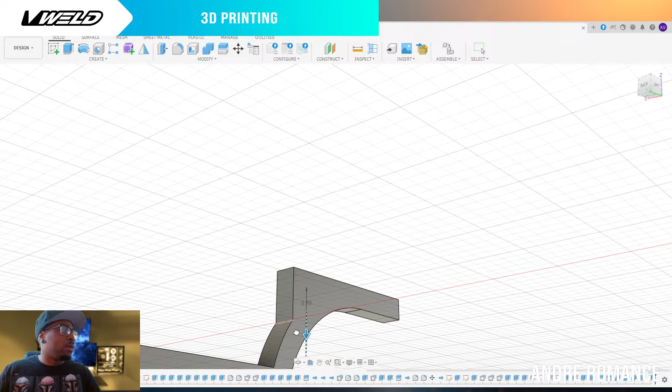And then if we want to take this thickness down, we can take this thickness down. All a part of designing. I can pull this and then it'll melt into that side rather than. Okay. All right, so aesthetically, this is going to be all right.

Having this amount available will give us a good lip to make this sturdy for the rest of the servo weight that's going to be hanging off on this back side here, because the servo from this point is going to be sticking out.

0.118 or 1.18, 1.15. Okay, about 1.15. So we're compensating for that, whatever that distance is that servo is going to be sticking out. That's just going to give us the sturdiness of holding that weight. So our mount here is going to curve off and come back.

There's going to be a screw here and then a screw back here somewhere to secure this bracket onto the frame. That would be, that's like my way of doing it.

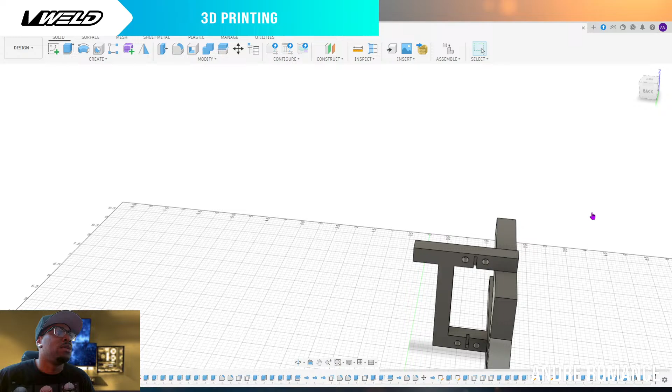Sometimes we can space this over so we can get a round edge here, so that that corner that we're going to bite into doesn't interfere with what we're doing here. Because let me see. Let's do this. So we'll go this route.

Let's extrude this to the surface here and create a new body. So now this body is overlapping that body there. And then we'll come and we'll cut this back to that.

We'll hide the frames. And we'll join this here. Join it back to this. That, cut that back, right there. All right.

What I was saying is that the edge of this corner here will be kind of brittle if we leave it like this, you know. But we know this will be a perfect fit for the servo to sit down in and mount here.

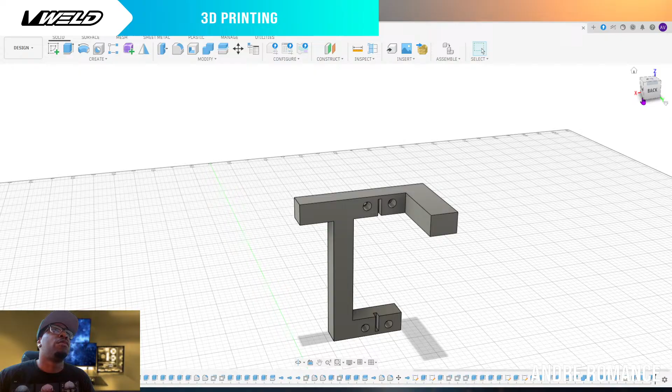Sometimes what I would do is push the servo to the side, like push the whole thing over to the left and cut like an L shape into the framework here. So this kind of hugs the side of the frame.

Whenever I do that overlap, usually that overlap is anywhere from a 0.2 to a 0.3 overlap. And this just stops it from moving left and right. That's just extra strength and durability if you want to do it that way.

We don't necessarily have to do it that way. We can put our holes at the top of here. There doesn't have to be a specific measurement for those holes either. We can just go from the top and drop our holes in. Our mounting points will be good to go.

On this bottom side here, we would rework these frame areas if you feel that this is more wasted material than needed to be. We can cut this up more and round this off to be a little more tailored and high cut.

But also this could be chamfered out as well. Like all of these design factors are, you know, something to consider. But as far as it being in this, looking like the way it is now, this gives us a good headspace to see exactly where it fits with the body.

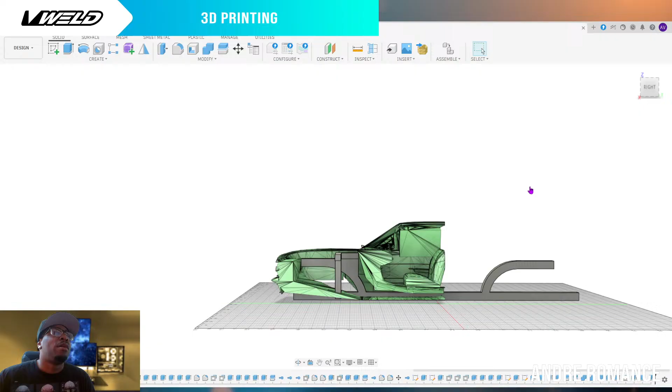See, those servos are gonna sit in there nicely. This right here isn't part of the design, it's just how it turned out inside the software. But we have enough room for the servo to sit here, and if not, we could still mount from the back side. In that case, we'd just have to cut and flip this portion here. That gives us two options inside the CAD software, inside the STL file, for whether they want to mount front or back. That's an option.

As far as where we sit now, we have a solid area to have everything positioned where we needed it to be. We have our servo above that mounting point we were talking about for the upper swing arm. Top swing arm, right? Our servo horn is going to be up here above that point. Because it's above that point, it's going to stick out on the side here. The swing arm mounting point is something we'll have to consider putting inside the servo mount right here.

Remember, I was talking about this space we have in between because we're at the center point, and we needed to figure out how to mount this upper swing arm without running into issues with it bumping into the servo horn. Well, we got our solution here. Because we have this sidebar, we can actually extend out a little more and create a lip for this to mount to, so that portion lines up with the idea that the servo is going to be in that spot too. So we don't have to worry about this hitting anything.

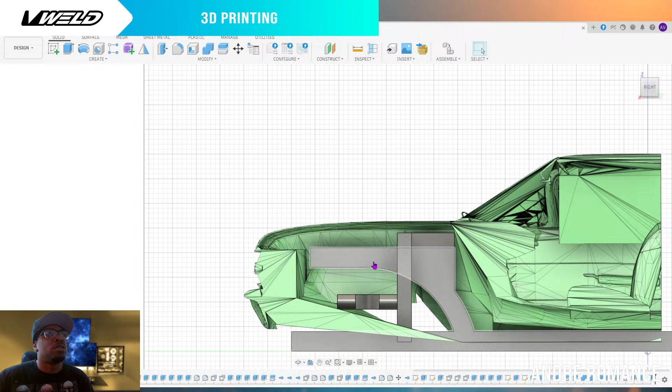The servo horn will come out, sitting out about this much here. This is where the back end of that servo mount will sit. The front end of it will probably land around about here. We'll have about a 0.2 gap between where that servo horn will mount with the top of the spring, so we'll possibly have a spacer in between to help with that. Usually I'll use a nut in between to give me that distance. But it all comes into play that we're in the ballpark of where we really want to be.

We're at a 0.38 coming off the flat surface to that clearance. This horn that I have right here, coming off that front side edge, we're sitting at 0.26, and this isn't the original horn we're going to use — it'll be a little bit thicker than this, but we'll be in a good space for this all to come together and work for us.

I'm kind of excited how this came together, because it's a matter of understanding that certain parts aren't going to get completed until you have other parts to help you get to that point. So from this to this, I think we were at a 0.3.

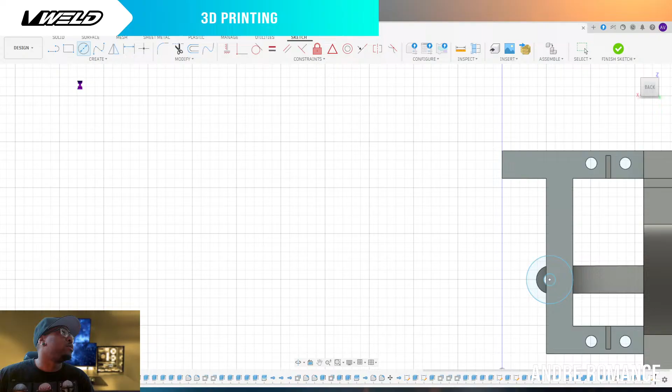We'll take... we gotta wait on it now. Oh, there we go.

We'll take the swing arm away, and we'll take the frame away, so we don't end up making that same mistake we did before. All right, so now we want to extrude this part here. We're going to do the whole circle, okay? Extrude to this side here. It wants to cut it out, but we don't want that — we want to join it.

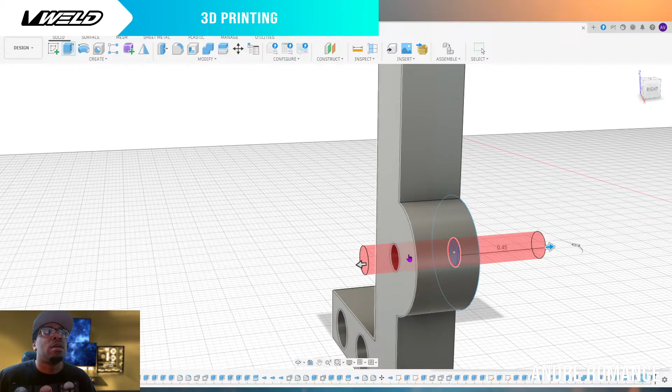Okay, we'll go back to this side, bring our sketch back up, go here where that hole was. We're going to use both sides of that hole. Even though we have that space, if we just cut that surface, we'll end up with that fine line I'm telling you about, that phantom line that'll show up in your print. Then we'll extrude this out to the surface here, or past it. We can go double-sided or simultaneous, and just drag it until we go through both sides. The best way to cut holes, in my opinion, because it guarantees you a clean cut.

All right, so we have this hole set out right here. That swing arm is going to be pressed with a fit. It's going to be pressed, if I'm not mistaken.

Let me look at that thing again. We would have to... yeah, we wouldn't be able. We will have to put the heat insert, brass insert on this part here, and then have our bolt on this side. If we do it any other way, it won't help us.

Then we'll go back to our 0.23, right? Come over here. Go back to our sketch, draw in a 0.23. Finish the sketch and press our thing down. I think we were at a 0.13 as far as our inset. In this case, it's going to be negative 0.23, or 0.13. Sorry about that, y'all.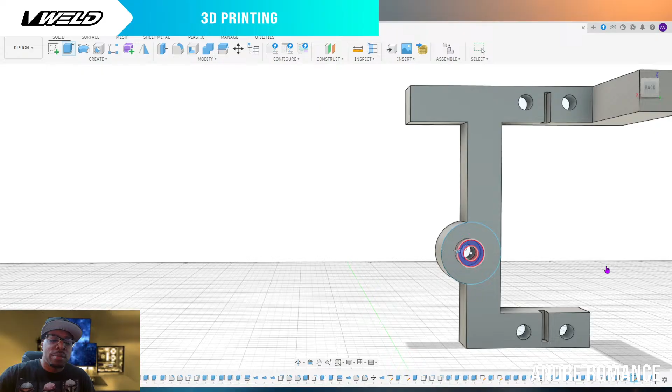Okay, so we have our area where things look nicely put together. If we want to sturdy out this hole, we do like we did before: we'll take the two edges, and this doesn't necessarily have to be done for this because it's already a sturdy hole, but we can always do a fillet and round it out. It just makes it look more smooth, more clean, more professional.

But also, like I was saying, doing this here to that angle there gives it more strength as well. Anytime you have a 90-degree bend in a part, there's always a chance it could break or snap, because that 90-degree is kind of like a tear, like a fold in the paper, which is going to have that easy break point.

So how we get rid of that is we round those edges off. But also keep in mind, don't round too many of your edges off in the beginning of your designing, because when you have to move things around or undo stuff, it becomes a hassle to fix parts and dimensions. When you have a bend like this, it makes it a whole lot harder to work with.

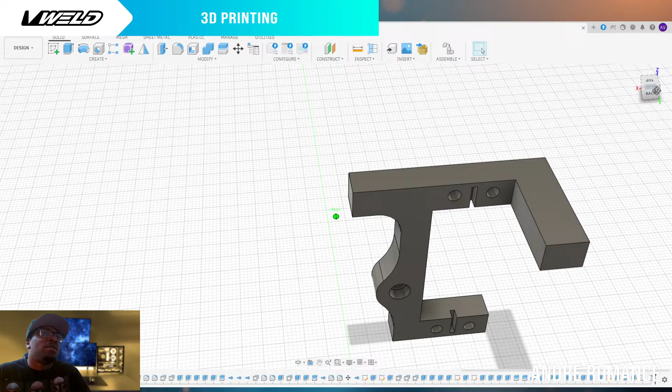I've been printing these parts with ABS for a while now, which works pretty good for the durability and the bend radius that they have, like for spring action — they don't snap as bad as PLA does. But if you've got something like nylon, you don't have to worry about these edges with nylon because nylon is a whole other beast. It's kind of hard to break nylon once you've got it in place. It does what it's supposed to do.

All right, so we are there with it. We still have to make that hole for that upper swing arm to be pressed in.

So now, on the flip side though, this side of the mount still has to be mounted to something. Now, in my opinion, I would rather see this mounted to the frame. So we go back to the frame. I would like to see this mounted to the frame somehow, and not just to have a screw that's coming straight through this. Because remember, we want this area open.

We want the center area open for that spring to come down here. So we don't want a bolt to come straight through this hole here. So we have to make a mount that's going to come from this part here and not interfere with any of that cutout area. We want this to be open strategically for that spring.

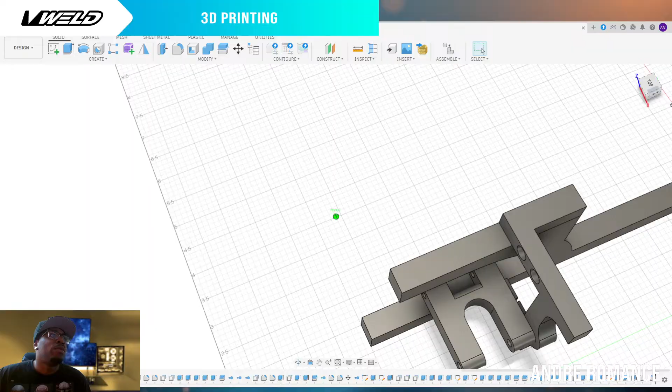So designing just a small bracket that comes off here and goes up to the top side is the next thing that we will do. I mean, we can do it either way though. We could have... no, that would be the best way.

Unless y'all got any options or opinions about how this thing should come together, that would be kind of dope, if y'all chimed in what y'all like to see. But where I'm at with it, I'm thinking a simple bracket coming off the front of this frame right here, just to come down and give that stability.

In these applications, 3-point contact is key. It really is key. So maybe for this frame, it can have that part coming off of it naturally. It doesn't necessarily have to be an add-on part. It can just be a part that's there.

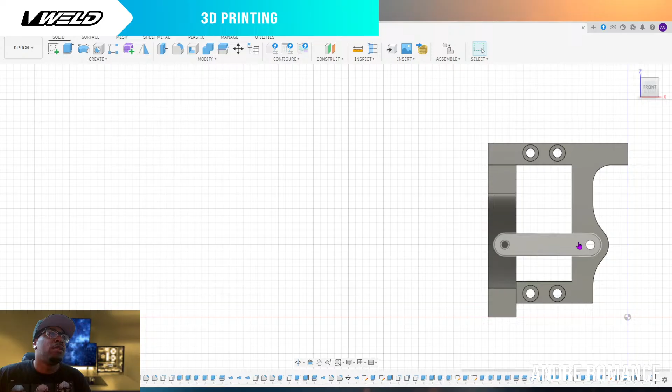Yeah, that might actually work. Let's do that and see if that is beneficial. So what I'll do is we'll draw based off of this frame, off of this surface here, and then let's save this for a quick second. I forget to save sometimes. Sometimes it will crash on you if you don't save it, and all your work will be gone.

All right, so off this surface here, we can get us a nice start. And I probably want to match this outer portion here and have that circle carry on till it gets up here or down here to where this is. So the thing about this is how do you want your parts to fall in together, whether you want them secured to this or to be a part of the frame, because we can do it either way.

Let's see here. So it's coming from that center line, and then oh no, let's get it from this line here. Let's draw some center lines. When in doubt, draw a center line, right? So we draw a center line that comes up here from here.

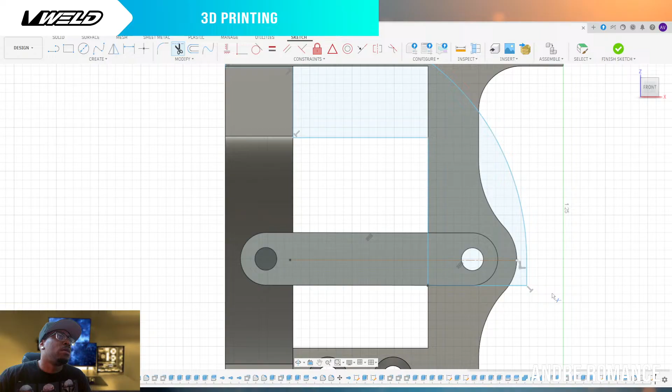All right, so let's finish. Or no, we got a little more work to do here. Let's cut this edge here and cut this circle here. All right, now I think we're ready.

All right, so let's do this. Come over here. This whole surface here. Say extrude 0.3 to match the framework that we already have. We'll get rid of the swing arm and the frame so that doesn't become a part.

I mean, also we could always do a new body instead of taking those views away, but it just helps me mentally to see what I want to see. But yeah, so swing arm coming from down off of this, like this is something like what I would like to see as far as a bracket be created that will hold that swing arm.

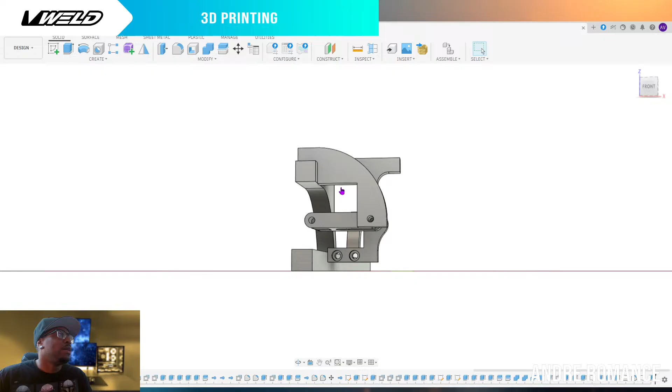Like that portion there, it doesn't have to necessarily come all the way down through the whole thing. It could just be a little lip that creates that space that you need to make that happen.

We did it again, let's undo that. We don't want to join these bodies together. We don't want that at all. So let's undo those for now.

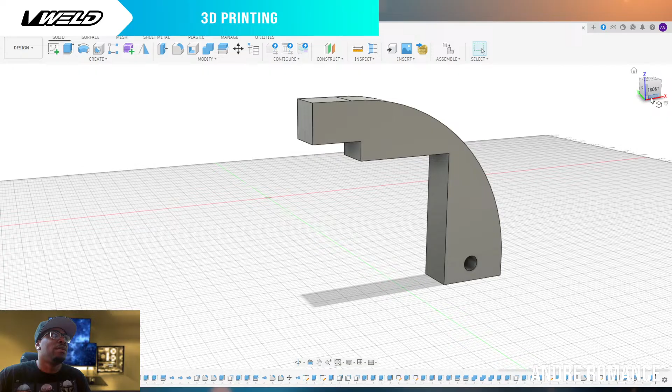But see, the little stuff like that, it causes you time and wastes your attention because you'll be thinking about moving somewhere else with the design, and then you get blindsided with something like that.

All right, so for this right here, this piece is pretty thick. I think overall we'll end up doing some work around a way to work around this and get it to where it's not as bulky as what we see here right now.

Yeah, it's a pretty bulky piece right now. The idea is to just get it drawn up to where it's gonna fit.

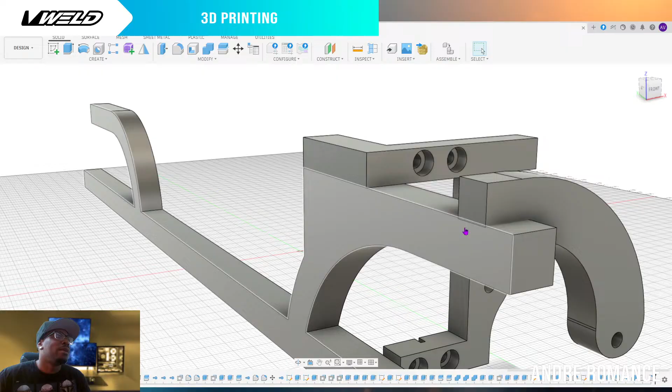There's this piece here that's eating into the frame. So take that and we'll be extruding that to where the frame is, right, like that. And then we will have that cut back and out the way. Yep.

But now that makes it a 0.29 rather than a 3. Sometimes there'll be some weird things going on. Maybe it's not all the way flat. That could mean...

All right, so I wouldn't technically want to print this part as connected to the servo mount either, unless you want to sit that long and watch the part be printed in that type of frame, you know, like those type of time limits - it's time consuming to print a part like this together.

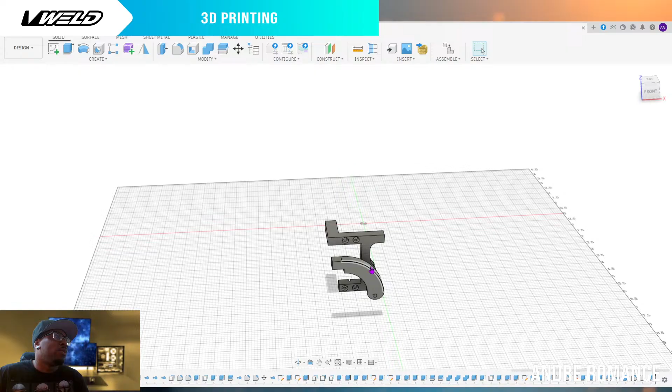It just comes down to the structural integrity of a piece like this and what this would be used for - holding up this part, with all that torque and all of the tension that part is going to have on it. You would want this part to be printed flat rather than upright with the layers being vertical to that pull. You want those layers to be flat on the pull.

Like where the bolts are, you got to shoot for the bolt sandwiching the layers together rather than the hole going down the center of the layers, because that pulls apart the layers. It pulls against the layers rather than sandwiching them and being a more sturdy part.

So that's why I'm looking at this in the sense of having multiple pieces. I thought we was gonna get to the back today, but man, we put a lot of work in on this today already. So I think this is probably a good stopping point for today.

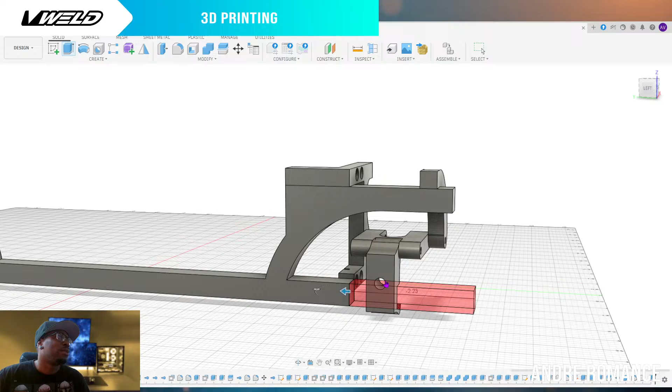I mean, now that we have the servo portion kind of set, we can push this rod here, we can push this back. Or we can cut it. We have our servo areas pretty set and ready to do.

There we go, so we'll cut it back to the servo, the width of the servo for now, just so we can kind of see all of the stuff we did just recently. All right, we didn't want to do that though - we don't want to cut through the knuckles.

I think like sometimes this - keeping in mind how these things behave, well it's gonna play a huge part in how you maneuver around this platform.

Let's see, front mount, which is gonna be gone now. That part goes away, right? Or should I say the top half goes away. The bottom half would possibly be attached to the bottom servo, the mount. That's something that we have to look at too.

This could be an all-in-one plug-and-play type ordeal as far as this servo mount. Doing the same thing that we did to this hole up here and having it come down here for this servo, for this bottom swing arm, would be like a really dope setup as far as it being on one piece. Having all the linkages set to the servo mount, and just being able to build the servo mount up to withstand that type of pressure.

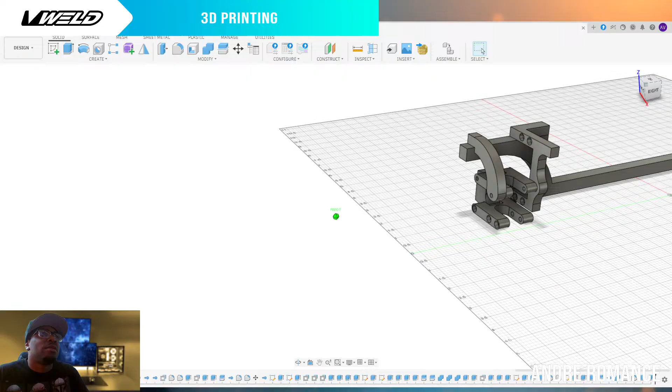It's kind of cool to think about, because there's different directions we can go with it. We also could have had the servo mount break off from here and secure the outside here as well. We could have did that. But for the base, we don't necessarily have to do that, because we're not gonna have this area open to compensate for the spring. We only need that top side open. So with this one being open the way it is, not necessarily needing to be open all the way, we can go straight through this bolt for the bottom side. But also, we can continue this bracket straight down as well, which would give us a lot more sturdiness for keeping them aligned. So that's something to think about, how this all comes together.

I think we did pretty good today. We have these pieces set in here. We can bring the body back in and see how these would come together. Let me see. Come on, don't think about it, just do it. All right, let's get to it.

So where we're sitting at right now, no wheel, from the front view, looking good. From the side view, still looking good. We still have that clearance right there with the hood. All of our screws are going to be inset, so countersunk holes, so we don't have to worry about touching the top of this hood at all. This is going to lay in here pretty nicely.

I think tomorrow we'll design a mock-up spring, so we can kind of see where that spring is going to set, and maybe do a mock-up servo as well, so we can see where that servo horn is going to lay in here. But preferably the servo horn is gonna end around that 0.3 area range, and we'll see that space that we have to create a link to for that servo horn to mount to the spring. But we'll see that tomorrow. I think that's where we'll go. And if you're in here tomorrow, please remind me, so you know that's where we'll start.

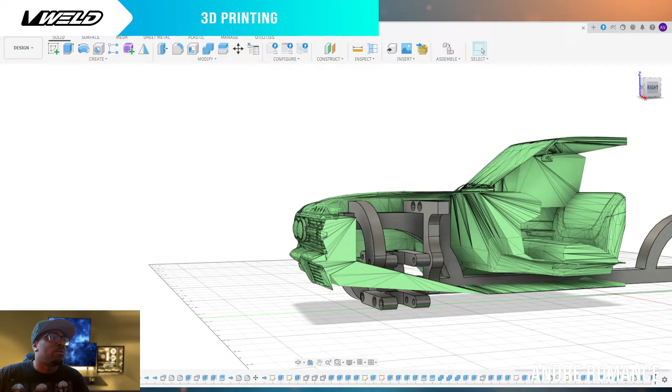But she's coming along nicely. This is going to be a crazy hopper. The actuation is going to be crazy, and we're gonna be able to get a full extent out from here. That's gonna be dope.

Our range is probably gonna be from up here though. Like that servo swing arm is gonna have to come in from the top side and then swing down to bottom about here. We won't be able to get a full half turn out of that servo, but hopefully we don't need to. Hopefully we can go with a shorter servo horn, and we don't have to take it up that high. We can come in at halfway, and then a quarter turn will get us to full ride height. But we'll see what happens tomorrow as we design these a little further.